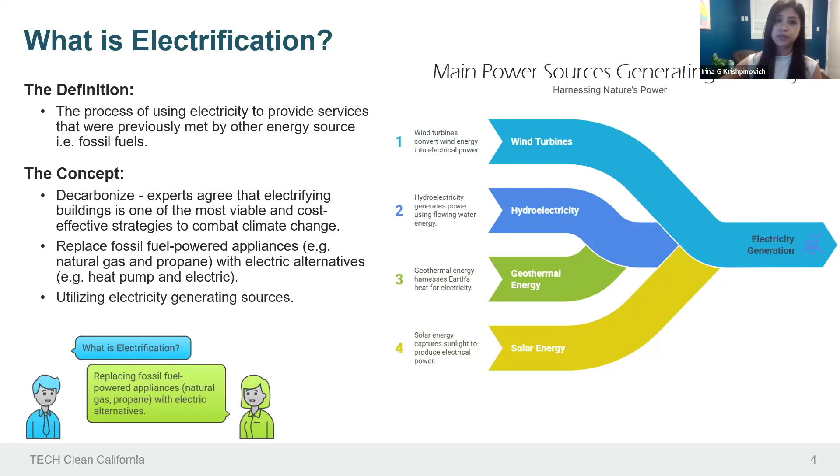An overview on decarbonization. What is decarbonization? In the previous slide we touched on what decarbonizing is in an action approach, but what ultimately is the term decarbonization? It is the process of reducing or eliminating carbon dioxide, CO2, emissions to mitigate climate change. The concept is to reduce or eliminate carbon dioxide emissions that result from human activities, primarily by decreasing the use of fossil fuels and increasing the adoption of low carbon and renewable energy sources.

Moreover, when replacing fossil fuel powered appliances, the electric alternative is key. Once more, the process of decarbonization is reducing and preferably eliminating emissions, reaching that net zero goal we have in place, reducing or eliminating the carbon dioxide emissions being released into our climate.

So when we're talking about carbon emissions from buildings, it could be retail or factory style emissions being released. We're also talking about vehicles, which release emissions into the air, no different than our common households: single family residences, mobile homes, multifamilies, and commercial buildings are definitely one of the leading contributors. Buildings account for 40% of global carbon emissions. A fun fact there, and hence the emphasis on building electrification as a whole.

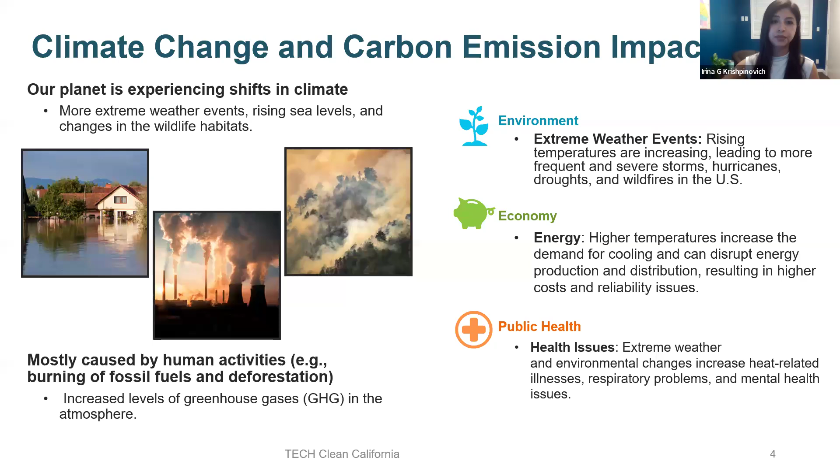Energy sources, that is, of course, fossil fuels. There's a couple different types of fossil fuels. Coal - burning coal for electricity generation is one of the largest sources of carbon dioxide emissions that we emit.

Next up is oil. Oil combustion, primarily in the form of gasoline and diesel fuel for transportation. And then lastly, one of the more commonly found within our residential home, if you haven't already fully electrified your building, is the burning of natural gas for electricity and heating, which emits and exposes us and our climate to carbon dioxide and methane.

A little fun fact: California is the nation's second largest natural gas consumer. Texas is number one.

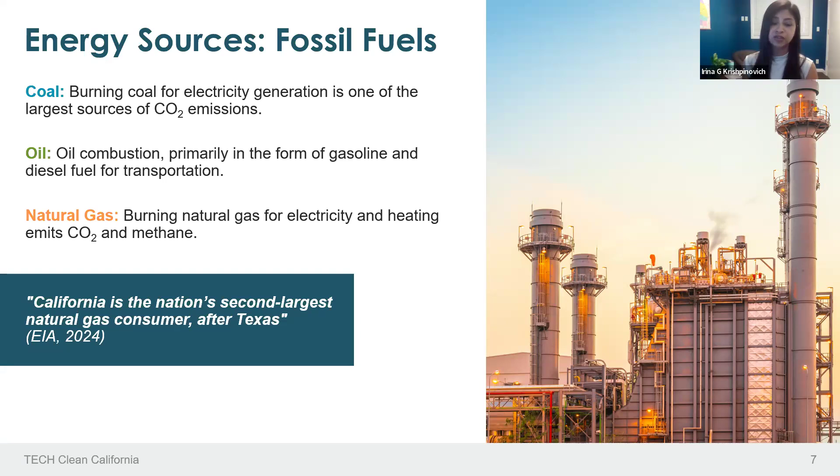Why electrification matters - a high level glimpse. We've talked about the impact of releasing these carbon emissions, how that plays a role in our environment, our overall health, and of course financially, what that cost is. So why does electrification matter?

Case in point, it improves our indoor air quality - no different than the impact we discussed in the environment outside of our home. When we electrify our home, we're also reducing the recycled air traveling through our ducting systems when we run our heating and cooling elements. So you're also seeing that co-benefit within the comfort of your home, adding that extra layer of safety and improving your indoor air quality.

Once more, I just touched on safety - electrification increases the safety and comfort within your home. Simultaneously, one of the many co-benefits to electrification is that we're contributing to reducing greenhouse gas emissions. In doing so, we're supporting renewable energy and energy efficiency through increased safety, eliminating risks of gas leaks and explosions. Improved air quality then reduces those harmful pollutants from combustion.

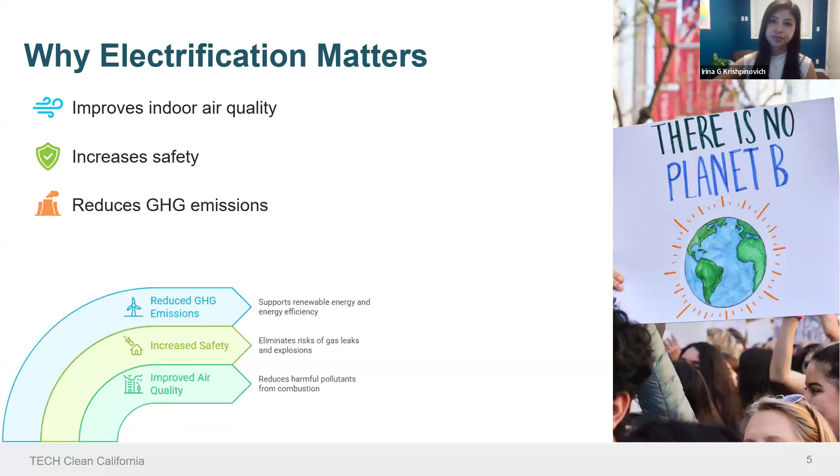So what is the state of California doing to be part of that solution? California's climate action strategy is being delivered through many different avenues, starting with key legislation and policies. Within the state of California, from a legislative perspective, we've already implemented and approved policies to advance clean energy alternatives: Assembly Bill 1279, Senate Bill 100, Senate Bill 1020, AB 3232, and Senate Bill 1477.

Aside from the legislative standpoint, we also have our governor setting bold clean building goals, with the ultimate intent to accelerate the deployment of clean and efficient fossil-fuel-free buildings. There's already a roadmap of targets we'd like to hit - by 2030, Governor Newsom's goal of 6 million heat pumps installed in buildings throughout the state of California.

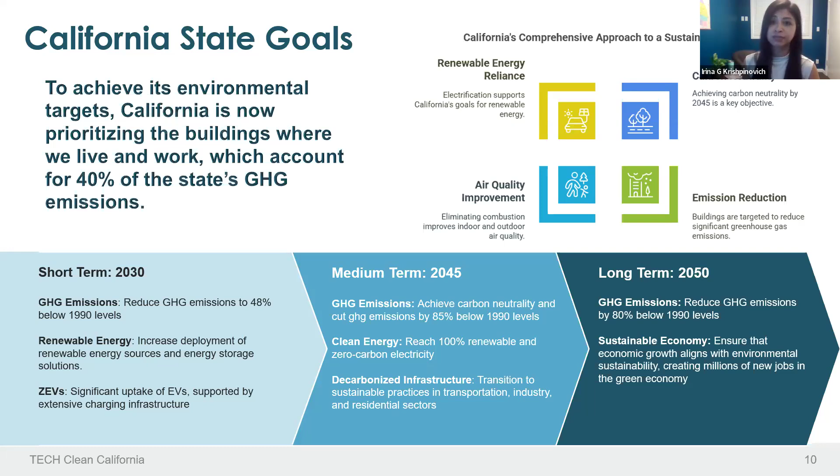The impactful role of electrification. What role does electrification play when we are talking about decarbonizing residential buildings? What does that look like? Before we get into the details of what that looks like in our home, let's take a step back and have a better glimpse of what exactly building electrification is.

Building electrification is the replacement of fossil fueled equipment, for example, space heating, water heating, and cooking, with electric alternatives. In other words, we're simply removing fossil fuels from the building's energy use or reliance.

Once more, that important question: why? Why is it important, why are we aiming to electrify our buildings? Decarbonization experts agree that electrifying buildings is one of the most viable and cost-effective strategies to combat climate change. The term electrify or electrification is essentially just a fancy word for fuel switching. When electricity is generated using a clean and renewable energy source, electrification actually becomes a strategy for building decarbonization.

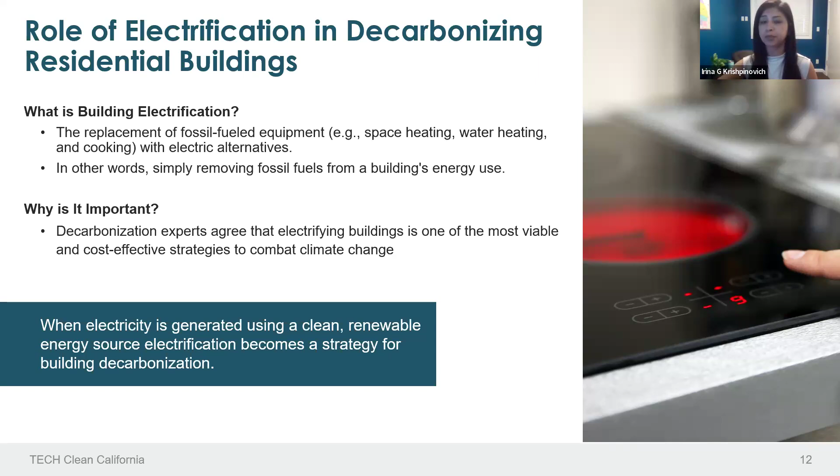Many traditional HVAC systems, especially the older models, require more fuel to produce the same amount of heat, so they're working harder to deliver more. Some electric heating systems are powered by electricity generated from fossil fuels, and the older electric heating systems can be much more inefficient.

Greenhouse gas emissions are changing our climate and affecting our health. So once more, reeling into why electrification matters: what are our options, how is this impacting things, at the end of the day who is reaping the benefits, and in essence the goal is a cleaner, healthier, sustainable future.

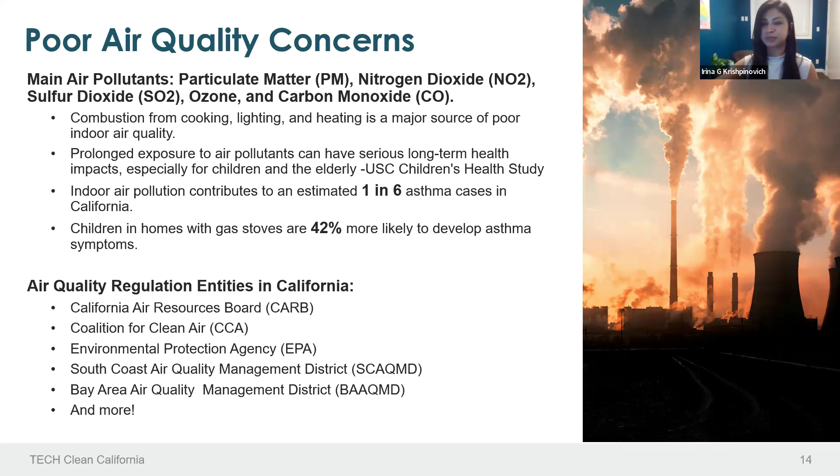Safety. Fire safety. When we're talking about electrification, we touched on the safety within how those emissions are affecting the quality of our health. There's other layers of safety to also take into consideration when we are educating our communities on fire safety.

Reduce risks associated with gas leaks, explosions, and fires. Additionally, modern electric appliances follow strict safety standards, significantly reducing fire risks. So when we are taking into consideration replacing your natural gas or propane fueled stove, for example, with an all-electric one, we are doing our due diligence in reducing or mitigating those fire risks.

Additionally, part of the safety component for us is going to be operational safety. Many modern electric appliances have built-in safety features, for example automatic shutoff features and temperature control features, and these types of safety features reduce the risk of overheating and accidents.

I am one guilty of it, in which I start boiling water, for example. I'm a multitasker, probably have slight adult ADD at times, completely forget that I have that water sitting on the pan boiling, and by the time I remember and come back, that water's probably almost gone. No different than I am guilty of having left a pan heating in oil.

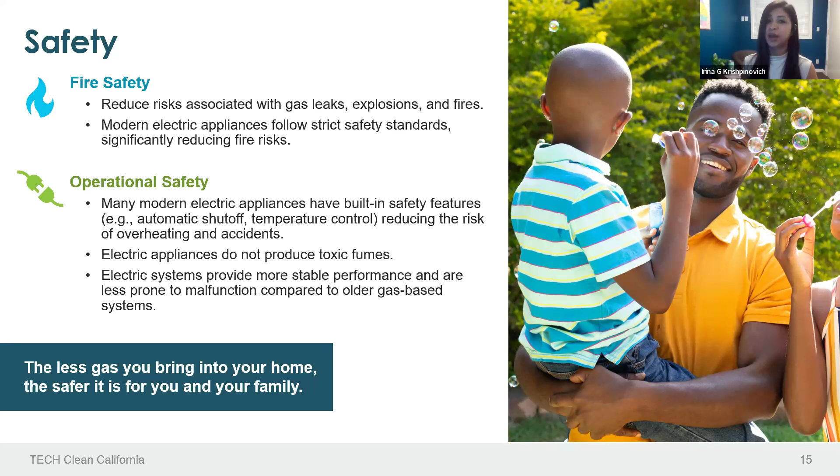Building electrification. So we touched on what building electrification is and what that essentially looks like within your home. What is the concept of building electrification? We're going to take a deeper dive into what exactly creates carbon within homes.

All release carbon dioxide and other pollutants like NOx during combustion, contributing to indoor pollution.

Essentially, here you see a graph breaking down some statistics from 2019, showing residential natural gas consumption per household within California. As we can see here, you have your more commonly running units within your home: your water heater, your space heating, whether that's your HVAC, your dual pack, your split system, or your mini split -- well, not mini split, we're talking about carbon releases here -- cooking, your dryers, and extending into miscellaneous items such as pools and spas.

Evidently here on our chart, we notice that water heating contributes to 59% of the consumption. So essentially, we use our water heater often, yet it is the one actually consuming or releasing the most, contributing to those thermal releases.

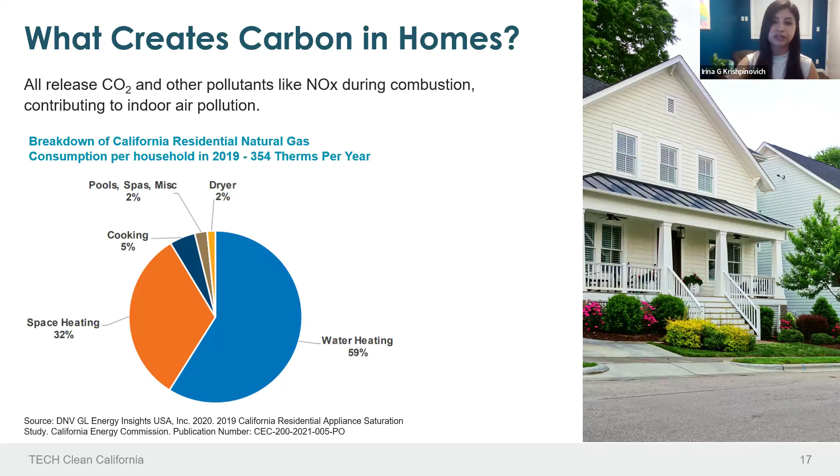So looking at that chart and better understanding the behaviors, or needs, within a residential home, we've been able to identify once more the most commonly utilized gas appliances within your home, but also which ones are consuming the most, and emitting the most of those unhealthy emissions.

So what are solutions or alternative solutions for those gas appliances? We're looking at heat pump technologies. Within the HVAC world, that can be a heat pump dual pack, a heat pump split system, or, if inadequate ducting or no ducting system is present in a home, an option of heat pump ductless mini split systems.

We also have an alternative option of heat pump water heaters, the electric and/or heat pump clothes dryer, as well as the electric resistance or induction cooktops. So essentially, here in a nutshell are four potential alternative options for us to be able to offer our communities when it comes to fuel switching, replacing their natural gas and/or propane fueled appliances for an all-electric, cleaner alternative.

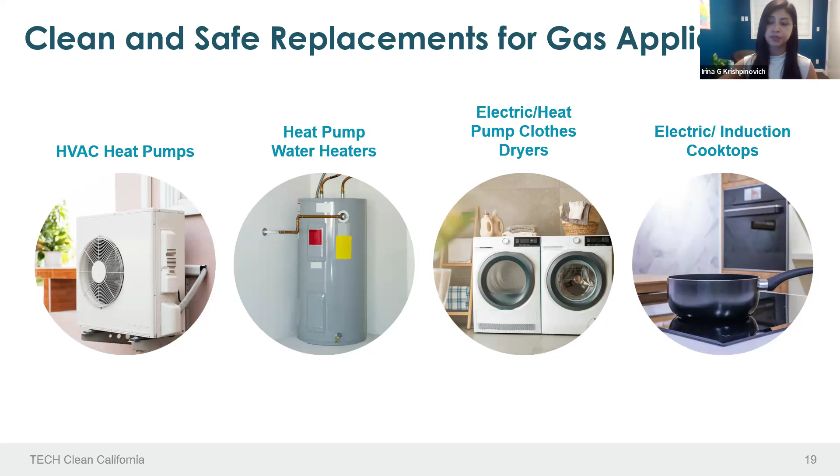What are those benefits of fuel switching? What are we looking at if we're giving up natural gas and propane and going on electric? As a community member or individual taking this into consideration, I would very much want to learn and understand what benefit am I getting out of this at the end of the day, not only for my home, but also doing my part ultimately for the world we live in.

So once more, electric appliances are much more efficient. For example, heat pumps can be up to 4 times more efficient than traditional gas furnaces.

We're also talking about cost savings. At the end of the day, we face communities where some members or residents are on fixed income, so we're talking about how this affects you positively, financially. Due to their efficiency, electric appliances often have lower operating costs. For example, heat pumps can significantly reduce heating and cooling costs.

A couple slides back, we touched on how older furnaces, older units have to work 2x, 3x, 4 times more. They have to draw more energy, requiring more to keep up with the output. The advanced technologies offered today actually deliver the same performance with less energy, making it more efficient.

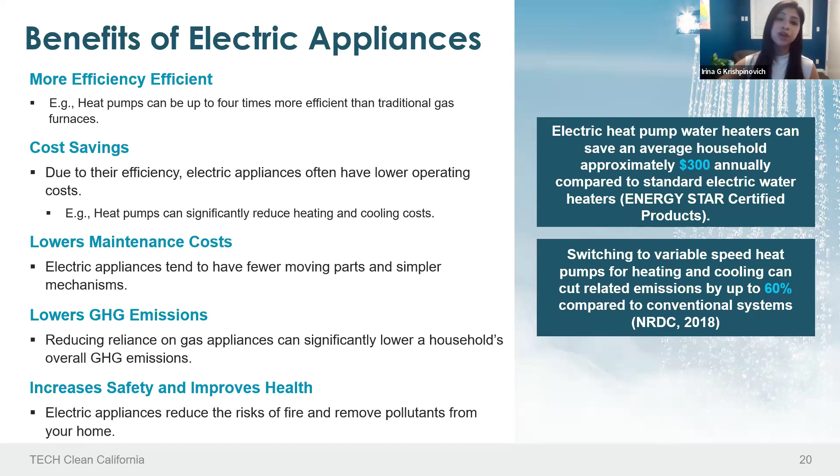The infamous question: what are heat pump technologies? In the market, we have a heat pump dual pack, a heat pump dryer, a heat pump water heater. But ultimately, what is a heat pump? How does it work? How is it beneficial to me, depending on a heat pump and the way its mechanisms function?

In essence, heat pumps are very essential for building electrification, because again we're talking about that fancy terminology of fuel switching. Benefits of heat pumps: they are efficient and versatile. That's what they offer, much more efficient, and they can still meet the demand of providing both your heating and your cooling. So not only is it the same performance, same output, in a much more efficient manner.

The cost and comfort at the end of the day for heat pump technologies: it offers higher cost savings with improved comfort.

One thing that is a commonly asked question, or not a concern but something to take into consideration within cold climates, is that heat pumps can actually use electric resistance heating elements as a backup method during very cold weather. After about, if I recall correctly, high 30 degrees, heat pump technologies like the heat pump water heater can be a hybrid. It's smart technology as well, where once it hits a particular temperature outside of its environment, it picks up that the weather outside hit less than a certain amount of degrees.

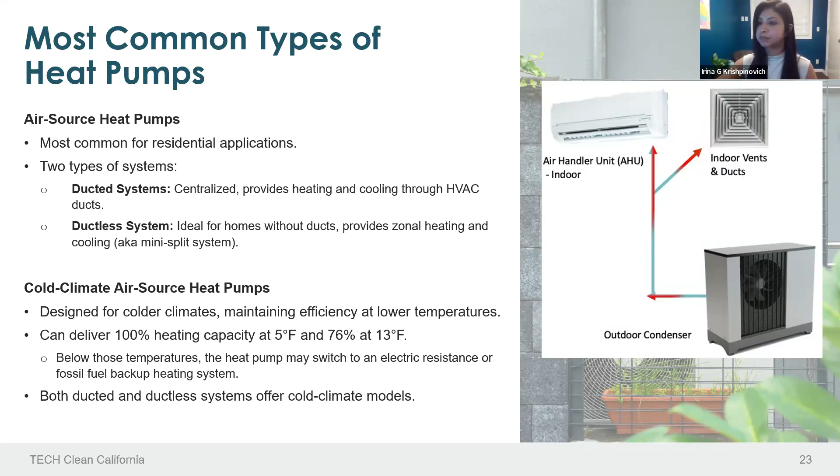Installation and maintenance considerations. These are just some high-level, commonly considered items when you go out into these communities' homes, when it comes to recommending, for example, what size unit we're looking at replacing and or installing for our customers or residents.

One is proper sizing. We need to ensure that heat pumps are appropriately sized for the space to maximize efficiency and performance. That is very key. An undersized unit may struggle to maintain desired temperatures, whereas an oversized unit may cycle on and off too frequently, leading to inefficiencies.

When we have these inefficiencies, besides the unit not performing to its design, that can lead to mechanical issues down the road. It could cause stress on the unit, and then you're also talking about high utility costs. It may also drive higher electrical rates if we do not take the proper, appropriate approach to properly sizing the units to meet the pre-existing conditions and needs of the home.

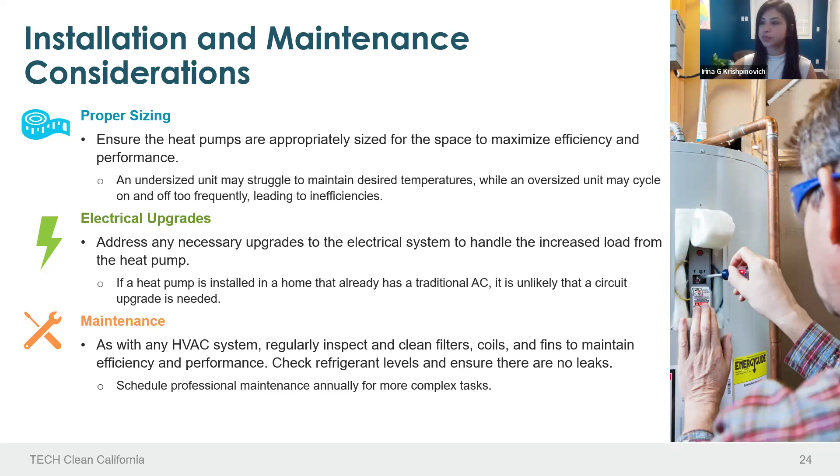This is another video, but I presume that there's not going to be any audio.

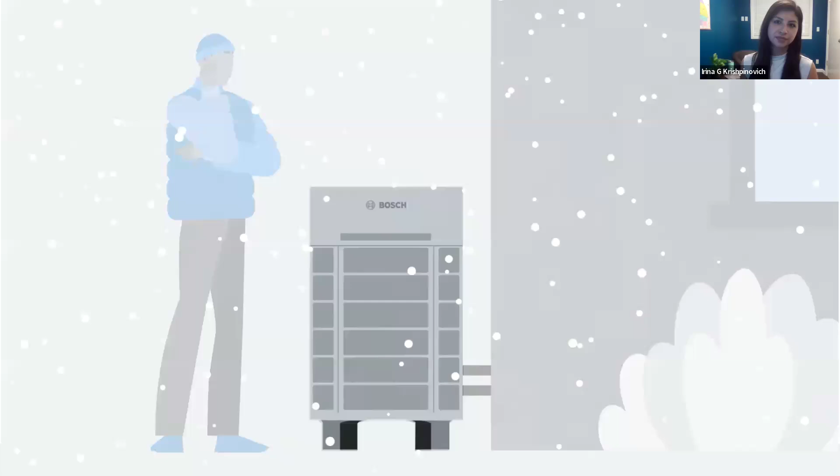Cooling and heating demands, heating during cold winter days and cooling in sweltering temperatures. It's Bosch's first air-to-air solution designed specifically for high-efficiency heating in cold climates. And since it's electric, it can help homeowners reduce their carbon footprint significantly. How does it work? There are basically two units, one outside, one inside. In winter, the outdoor unit absorbs the remaining heat that exists in cold air. Even the coldest air contains some heat, and Bosch efficiently captures that energy into the refrigerant. The refrigerant gets compressed to increase its temperature even more and releases it at the heat exchanger in the air handler inside the home, which distributes that warm air through the whole home for cozy, warm indoor temperatures.

In summer, the process is reversed. The air handler absorbs the heat from the air inside, and the heat pump transfers it to the air outside. The compressor circulates refrigerant to the indoor evaporator coil, and the refrigerant absorbs heat as it passes over the indoor air. The resulting cool and dehumidified air then gets blown back into the home. In short, the new inverter heat pump from Bosch offers the heating and cooling solution for almost all weather conditions.

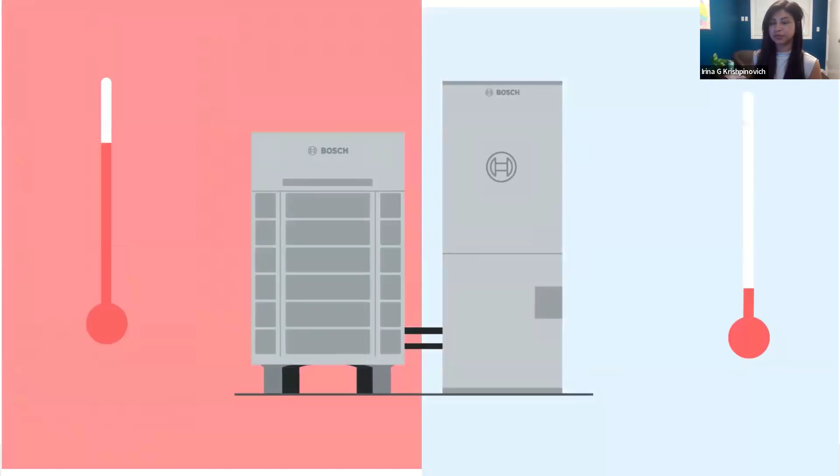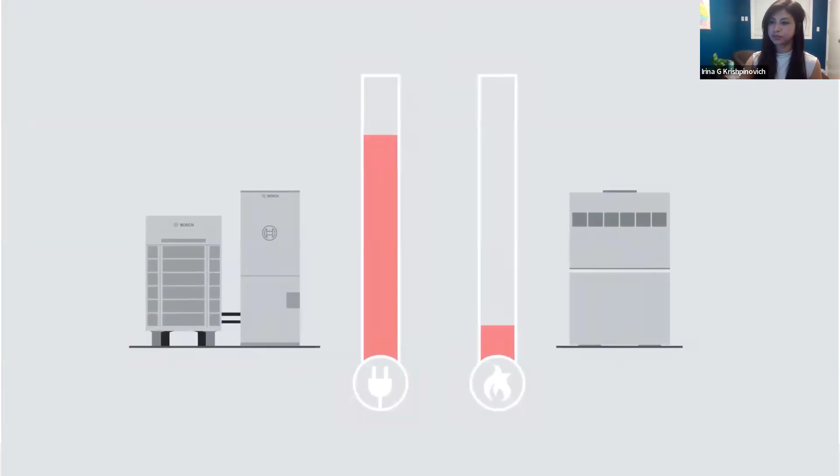Another step forward towards a cleaner energy future. So North America, energized like a Bosch.

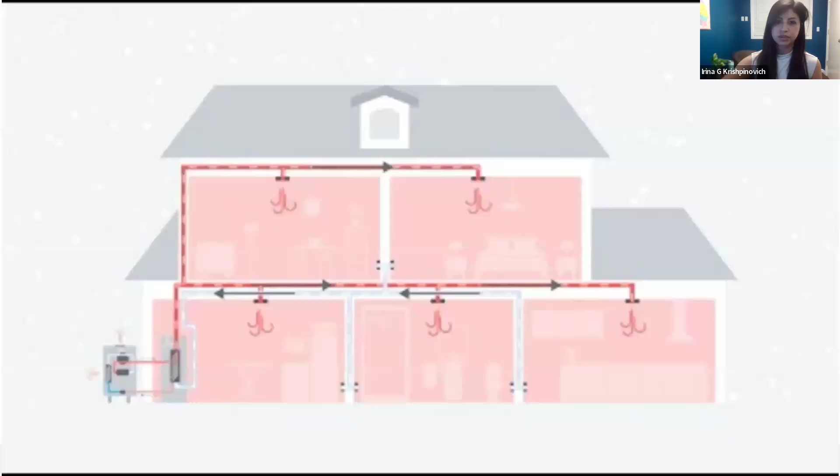So Bosch is just one of those manufacturers who are providing inverter units, heat pump units at the end of the day. Just one of many different manufacturers out there offering this technology for HVAC.

We're going to move right into heat pump water heaters. I'm very glad there was audio on the last video. In essence, not to market this, this is not a paid promotion for Bosch, definitely would like to add that disclaimer here. But really liked how that video, in a nutshell, very clean, very clear, provides a good understanding of how a heat pump functions.

But moreover, this other layer or piece that may be a concern when we're having these conversations in the field with our communities is that people have heard when temperatures drop, that unit doesn't work. Well, it does, and this is how. So once more, these are the tools, this is the education that we're having this ambassador training today to provide you with that knowledge, those tools and resources, so that you can confidently be empowered to articulate and answer those questions and concerns that community members have when it comes to electrification, specifically heat pump technology and how it's still capable of performing even in 5-degree weather, which we don't get here in California, but nevertheless certain climates can get that cold.

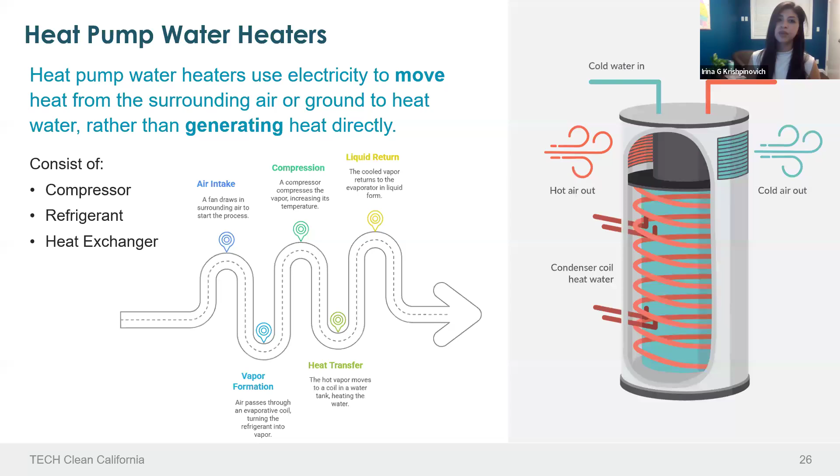What are some advantages of heat pump water heaters? Lower upfront costs for customers, and we're lowering operating costs overall.

It's offering operation control. Once more, it's a smart system, right? It's going to be able to adjust to not only the demand of the home, but also acclimate to weather conditions, and reduce emissions.

We've talked about the importance of reducing and or eliminating those greenhouse gas emissions by consuming less energy. We have increased resilience. The stored water in a heat pump water heater provides hot water even during an outage, so you still have access to that hot water. And then also more energy efficiency.

Once more, talking about the newest and latest modernized units, the technology just keeps improving, always working out the kinks of where we were at 5 years ago. Heat pump technology has advanced significantly since, so they've indefinitely become much more energy efficient, utilizing less energy, and essentially they use 50 to 70% less energy while still heating the same amount of water.

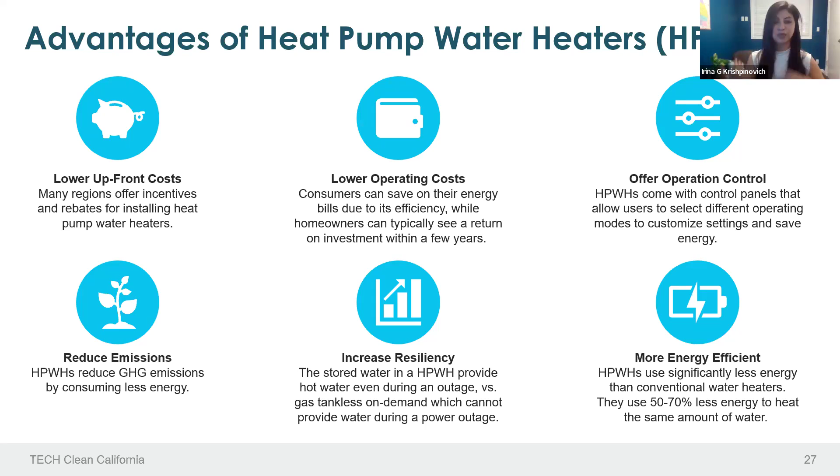So we talked about performance - delivery is still there to meet your demand as comparison to that of a natural gas and or propane fueled system. But once more, the system's not working as hard, thus not requiring as much energy, thus you're not consuming as much energy, hence reducing our energy usage and utility bills.

Installation considerations when we are looking at recommending a heat pump water heater for a replacement and or installation in our communities. Number one, of course, upon approach - and contractors, I know you're very mindful already of this when you are approaching a home - indefinitely space requirements.

Heat pump water heaters actually need a little bit more space than your traditional natural gas water heaters compared to the conventional water heaters that we're accustomed to, because they actually require and rely on that airflow that's circulating around the unit to be able to function efficiently.

Ventilation, proper ventilation is critical and crucial for heat pump water heaters to ensure that they are efficiently extracting those heat molecules from the air. They should be installed in locations where the air temperature remains relatively moderate throughout the year.

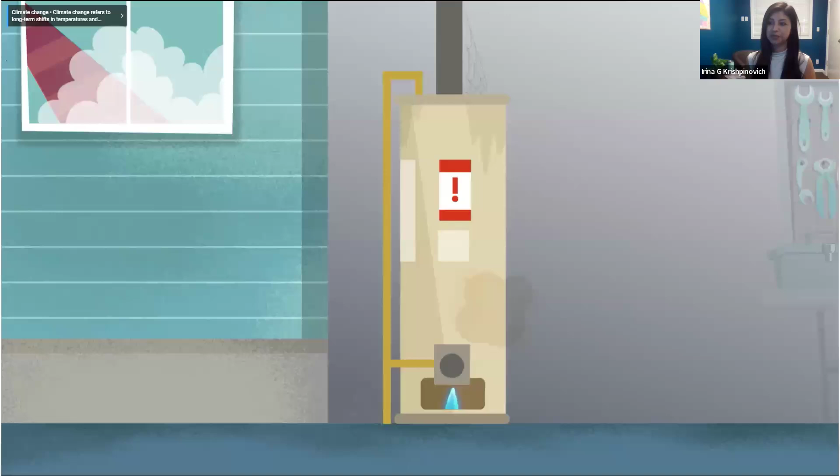Water heaters are the unsung heroes of our homes. They labor without pay or pause, stuck in the closet or garage, and most of us don't give them a second thought. That is, until they break. Then we want to replace them fast and get back to our busy lives. We typically just slap in the same old technology, like gas, without considering that we might be missing out on a better alternative: ultra-efficient electric heat pump water heaters.

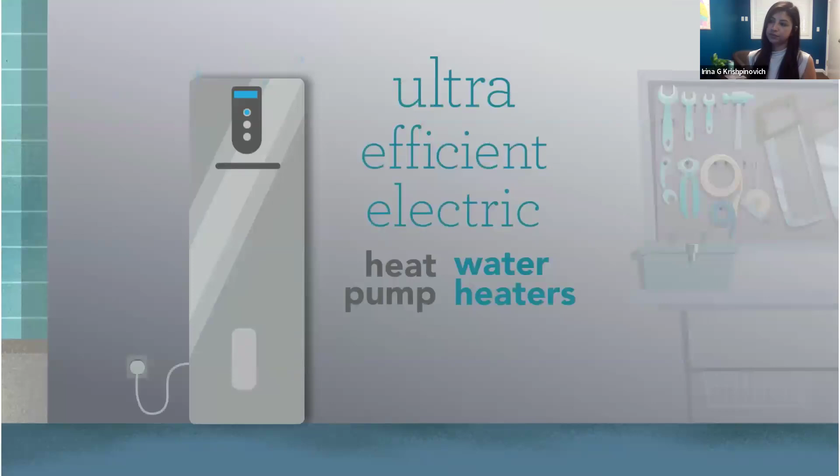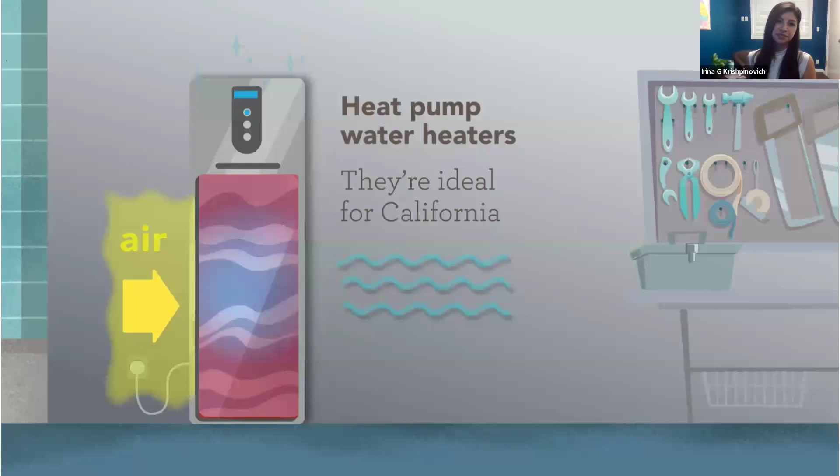Heat pump water heaters use electricity to move heat from the outside air into your water heater, like a refrigerator running in reverse. They're ideal for California, where our winters are mild. And because they're only moving heat from one place to another and not actually creating heat, they're super efficient. This efficiency can amount to savings on your energy bill.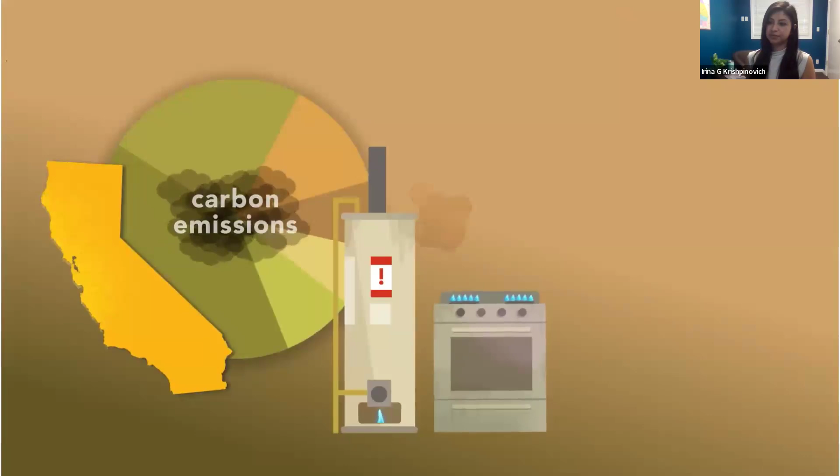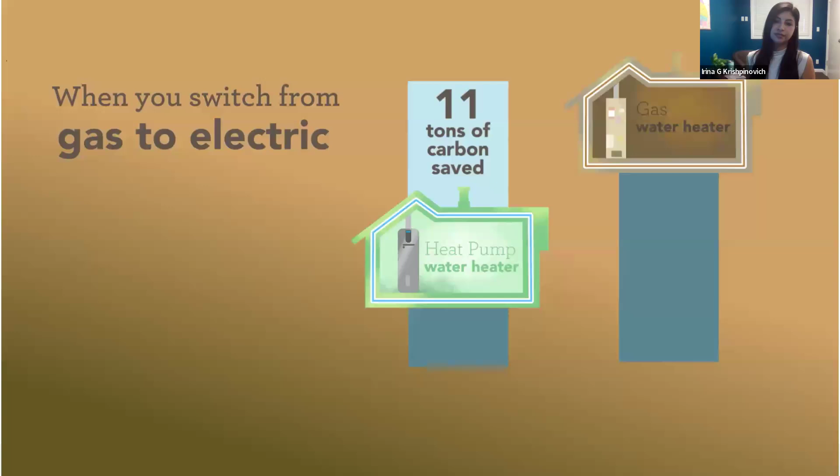If we don't start getting rid of our gas appliances, we'll never get ahead of climate change. Here in California, one of the biggest sources of greenhouse gas emissions is from burning gas for heat and hot water. When you switch from gas to electric, you avoid emitting about 11 tons of carbon dioxide over the estimated life of your new water heater. You'd have to plant 11 large shade trees and wait more than 50 years to absorb the same amount of carbon.

Not only will you save money and fight climate change, you'll help create a healthier community. That's because gas appliances like water heaters emit carbon monoxide, ozone, and particulate matter, the types of harmful pollutants that can lead to respiratory illnesses. Studies show that getting rid of gas appliances could save thousands of lives and billions of dollars in California every year.

So, when your water heater needs to be replaced, consider a more efficient technology. Heat pump water heaters are safer, healthier, fight climate change, and save you money.

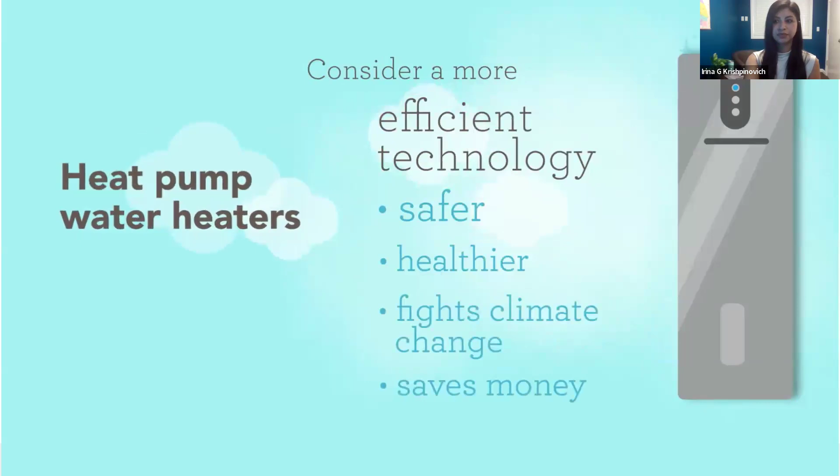Awesome. Water heater. Induction cooking. So induction ranges.

For this particular appliance, induction stoves utilize electromagnetic fields to directly heat pots and pans made of magnetic materials. So in essence, whether that be a cooktop, a standalone, or slide-in range, the top surface layer will require special pots and pans. Some customers may already have unique pots and pans that are compatible with induction ranges without even knowing it. But one thing to highlight is that not just any pan or pot will work to be compatible with these induction ranges, because of that electromagnetic field, and there's a purpose behind that.

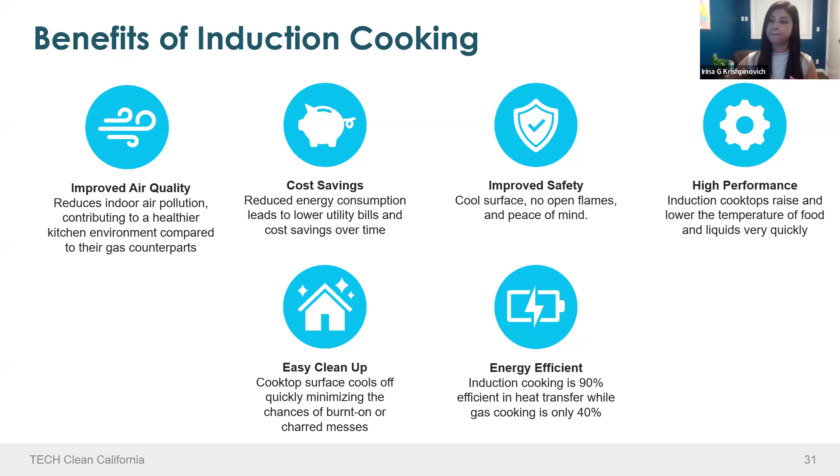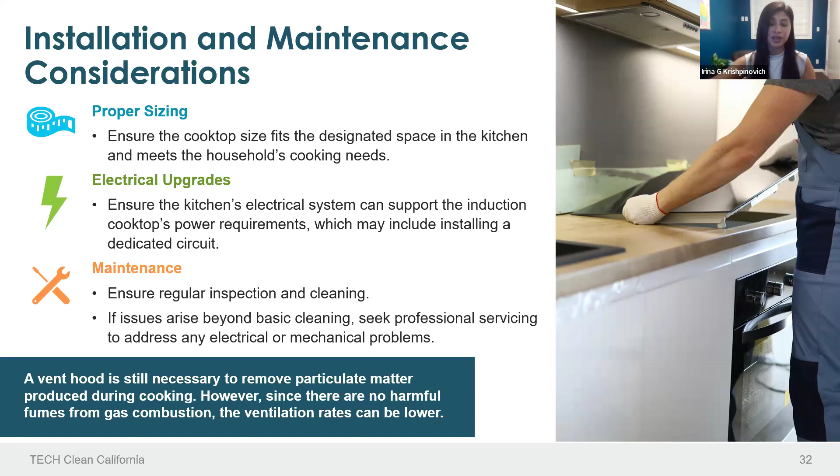Induction cooking generates heat by combining electricity and the magnetic properties found in most pots and pans. The cooktop remains cool to the touch until you place your induction-compatible pan onto the glass surface to begin heating. Once placed, it quickly and precisely heats to the selected temperature.

Most high-quality pans will work with induction cooking. If you want to be sure, you can test them by holding a magnet to the base. If the magnet sticks, your cookware will work with induction.

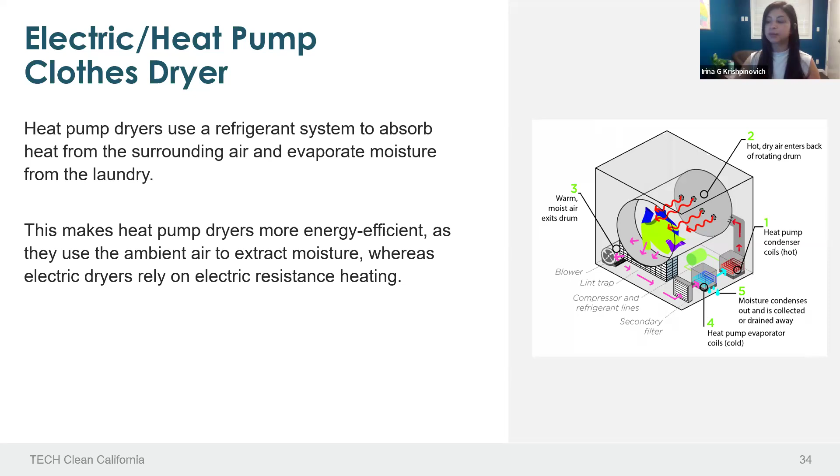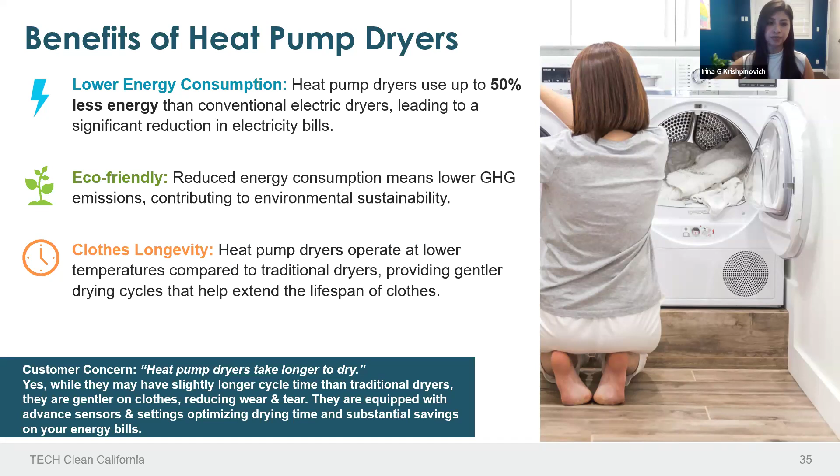Installation considerations for this appliance: heat pump dryers typically require more space for proper ventilation and may have a higher upfront cost compared to conventional electric dryers. However, it's important to note that energy savings over time can offset the initial cost, the return on investment when investing in these dryers upfront. Heat pump dryers do not require external venting, unlike gas dryers and traditional electric dryers, which simplifies installation and reduces the need for additional accessories or equipment.

Lastly, maintenance: regular maintenance, such as cleaning the lint filter and ensuring proper ventilation, is critical and essential to maintain the efficiency and performance of heat pump dryers.

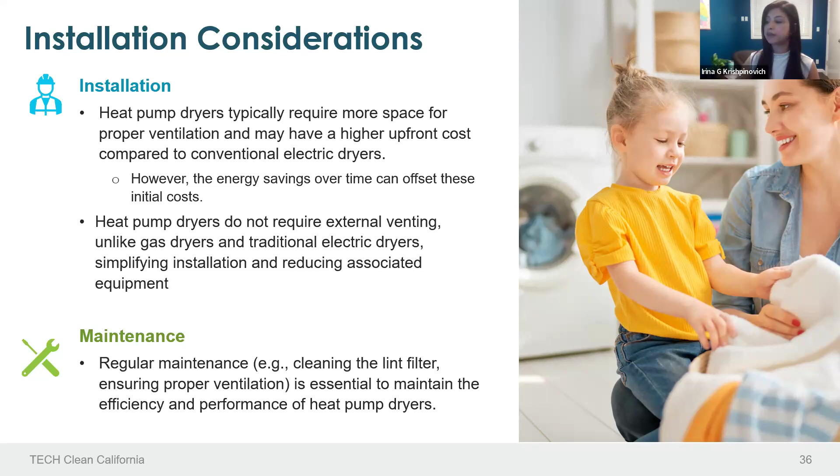Why should you upgrade to an ENERGY STAR certified heat pump dryer? Well, if you want to get technical, let's look at the innovative way it saves energy. Notice there's no heating element and no vent.

But why? A heat pump uses technology similar to an air conditioner, but operates in reverse. Air is pulled through a condenser where it is heated before entering the drum. The hot air then absorbs moisture from your clothes. Next, the damp air goes into an evaporator, which removes the moisture and collects or drains it.

The real savings happen next, when that same air is pulled back through the condenser to be reheated while still warm. In other words, we save by recycling warm air instead of releasing it through a vent and using energy to heat new cold air. Now that's a good use of hot air.

So remember, while on the outside this dryer may look the same as other dryers, it is special because the heat pump technology on the inside uses 50% less energy, and that's 100% great for us and the environment. Find your ENERGY STAR certified heat pump dryer at ENERGYSTAR.gov/HP dryer.

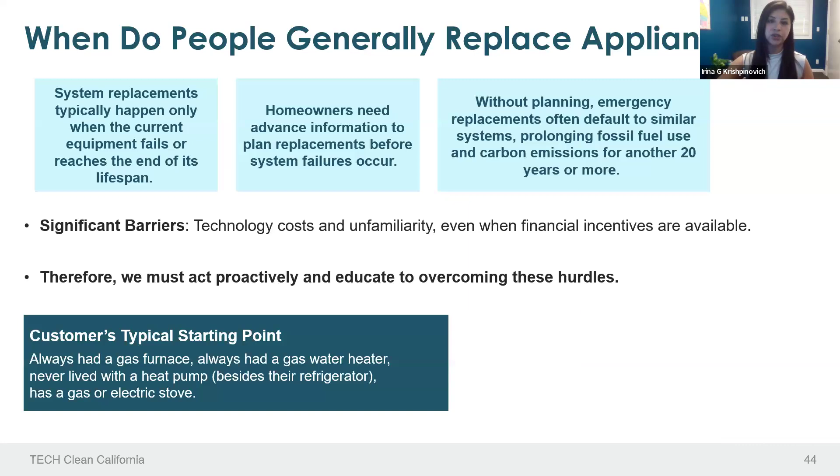I did not mean to do that, so I find it odd how it skipped. I think we went from break to customer communication and the value, and then to when do people generally replace appliances?

I am going to move right into messaging strategies for quality of life improvements through electrification. Some items to continue to consider—I feel like we've been repeating this one as well—improved indoor air quality.

We're talking about the comfort within your home: consistent temperatures, quiet operations from those appliances. And then there's these other added values that sometimes we fail to recognize, like added property value when we are modernizing our homes. That does also actually increase property values.

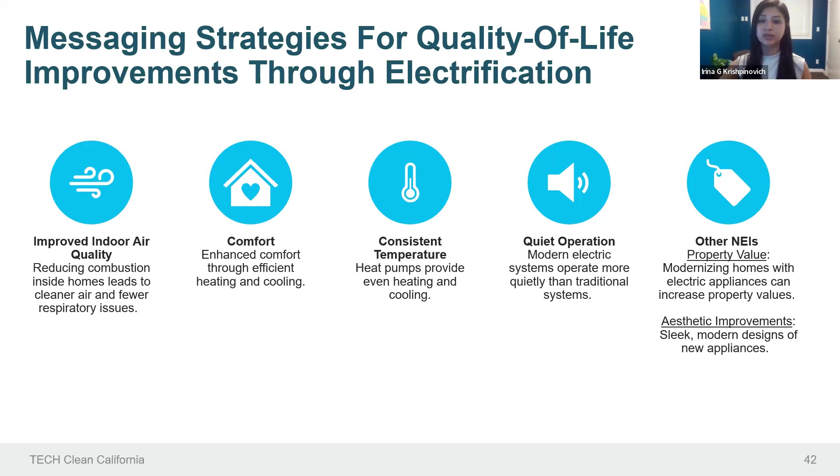Time of use behavioral education to avoid peak prices. There are many different tiers that our utilities now offer, so knowing and understanding how the TOU rates work can actually help those consumers save on their electricity bill by using more energy during off-peak times versus when the rates are higher.

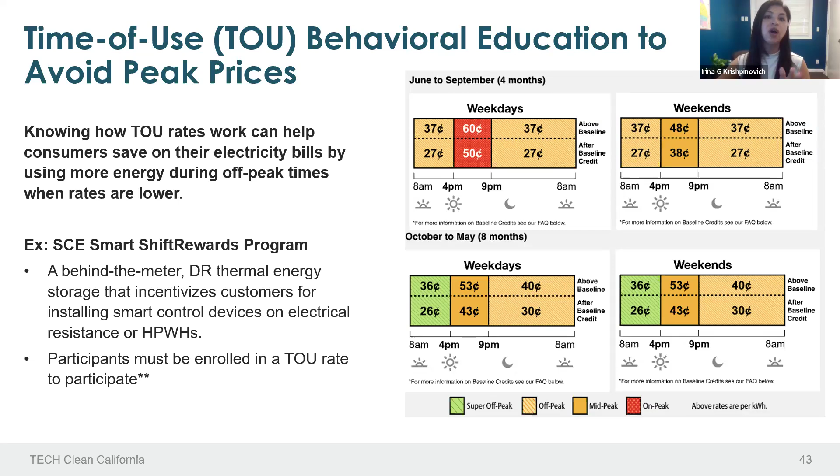This is another layer of education as our due diligence as contractors, CBOs in the field, to continue to provide consumers, the customers, the residents, with that added layer of education for them to better understand how their behavior towards energy consumption also plays a factor when we're talking about energy conservation.

Time of use behavioral tips, once more on appliance use. Running appliances such as your dishwasher and laundry appliances during off-peak hours, automation using smart technologies already built into some of our units, for example the smart thermostat, to manage energy usage. Preheating and pre-cooling your home during off-peak times can maintain comfort within your home, minimizing energy costs during peak hours.

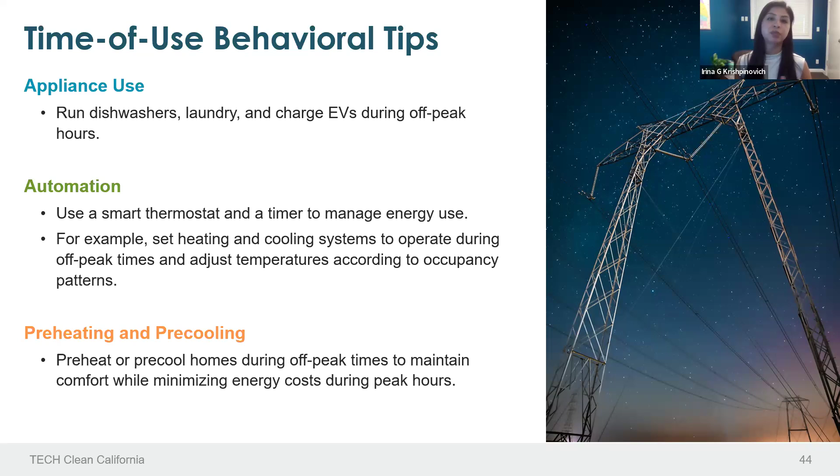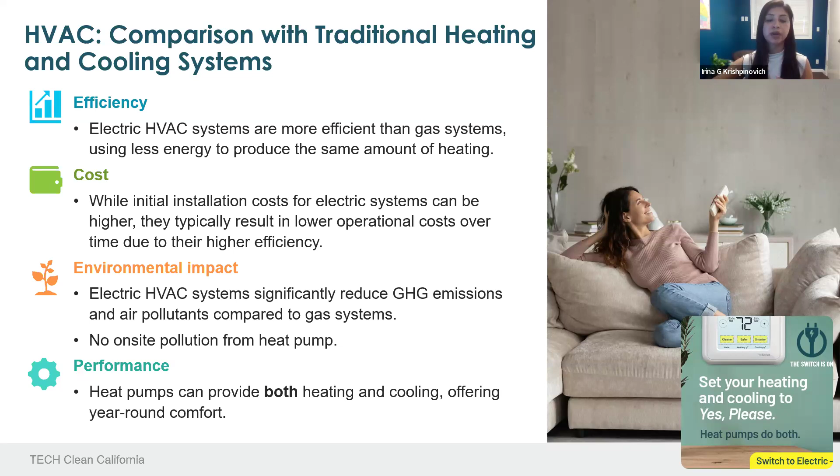Heat pumps can provide both heating and cooling, offering year-round comfort. The HVAC temperature and airflow, the CFMs - heat produced by a heat pump feels different than that produced by a furnace or a radiator. So it's very much about understanding temperature regulation. Heat pumps may deliver heat at a lower temperature than gas furnaces, but can still maintain a comfortable indoor environment.

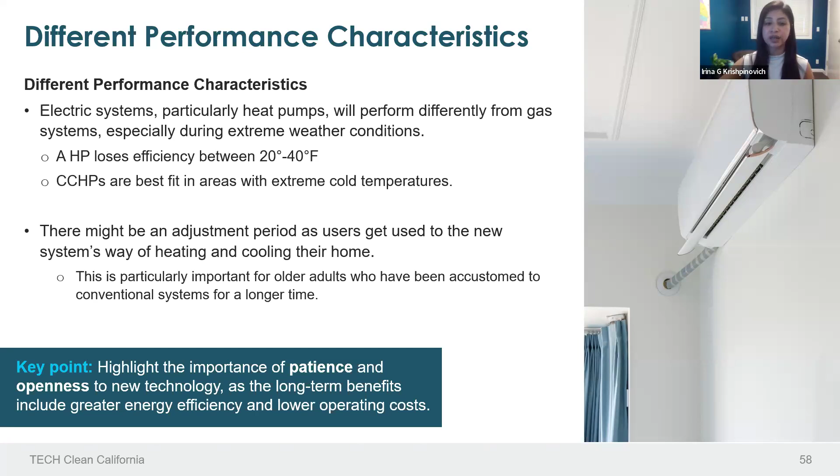We're also looking into the airflow. Heat pumps circulate air differently, often providing a steadier but more continuous airflow compared to traditional systems. Think of a heat pump similar to the cooling and heating of your car and how its characteristics operate - different performance characteristics. Electric systems, particularly heat pumps, will perform differently from gas systems, especially during extreme weather conditions. A key point to highlight is the importance of patience and openness to new technology, because the long-term benefits include greater energy efficiency and lower operating costs.

Common troubleshooting steps for minor issues with HVAC heat pumps: for example, an issue is reduced airflow. A potential solution we can walk a customer through is to clean or replace the air filters and ensure the outdoor unit is free of obstructions. Another common issue in troubleshooting HVAC heat pumps is that the system is not heating or cooling effectively. A potential solution we can recommend is to check your thermostat settings and ensure it is set correctly. Customers may also want to verify that the unit has power and is not in defrost mode.

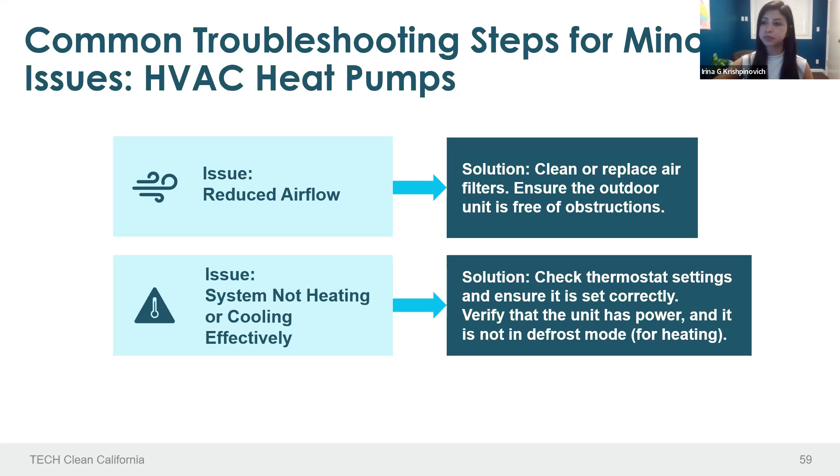Water heating, understanding and explaining operational modes of heat pumps. For example, when to set it in hybrid versus vacation versus keeping it in heat pump mode.

Heat pump water heaters use only the heat pump feature, but when we have it strictly in heat pump performance, that is the most energy efficient water operating system that you can set that heat pump on.

When you're setting it on vacation, for example you're going to be gone for a week or a couple weeks or a month at a time, you can set your water heater on vacation mode. This maintains lower temperatures when the home is unoccupied to save energy.

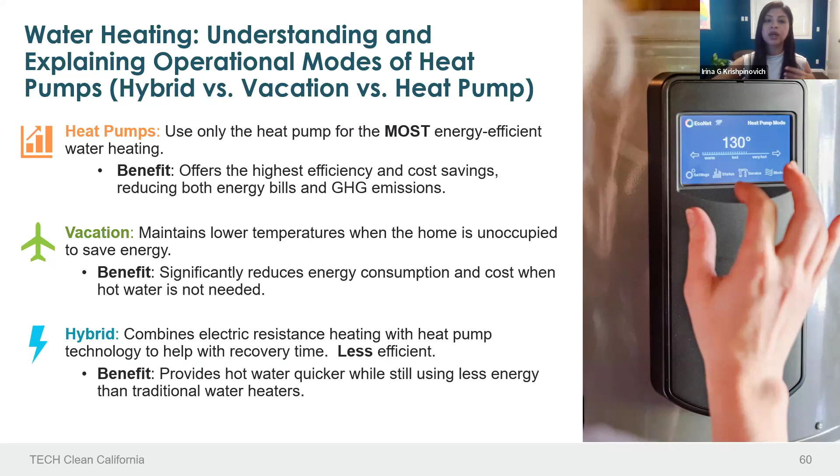There's also setting it to hybrid mode. In hybrid mode, it combines electric resistance heating with heat pump technology to help with recovery time. It's a little less efficient compared to heat pump mode alone, hence why we set those units to heat pump mode to optimize energy efficiency. But the benefit of hybrid is it still provides hot water quicker while using less energy than traditional water heaters ultimately.

Common troubleshooting steps for minor issues with heat pump water heaters. The customer may share that the water is not heating sufficiently. Solution: check the thermostat setting at the unit and ensure it is set to the desired temperature, more often than not 120 degrees, without it being scalding hot.

120 Fahrenheit is what we set it to, specifically to manufacturer standards, and verify that the heat pump mode is active. For any strange noises coming from the unit, inspect for any loose parts or debris around the unit. If the noise persists, contact a professional for further inspection.

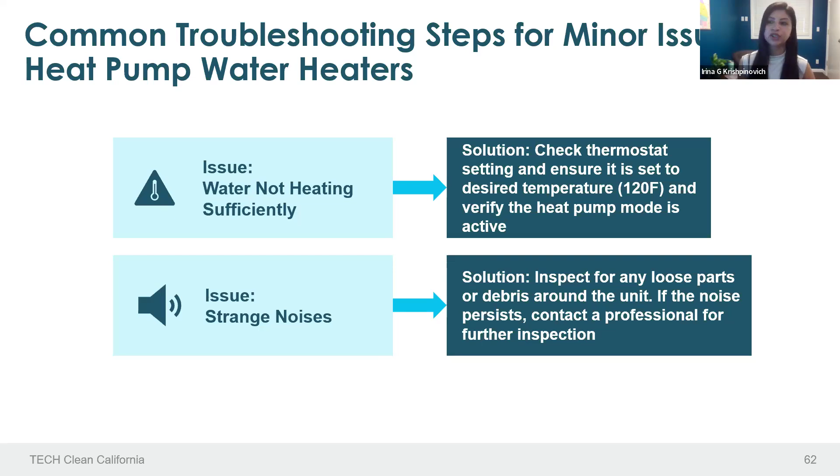Operational tips for heat pumps. Looking at the thermal settings, we want to set that heat pump water thermostat to an optimal temperature for efficiency and safety. Regular maintenance, ensuring the unit, if outdoor, is clear of debris, maintaining airflow efficiency, cleaning or replacing air filters in the HVAC systems.

And professional servicing is recommended, seeking a routine servicing plan for any of your units, whether or not you have a heat pump, even if you're just gas or electric, still servicing your units to maintain optimal performance.

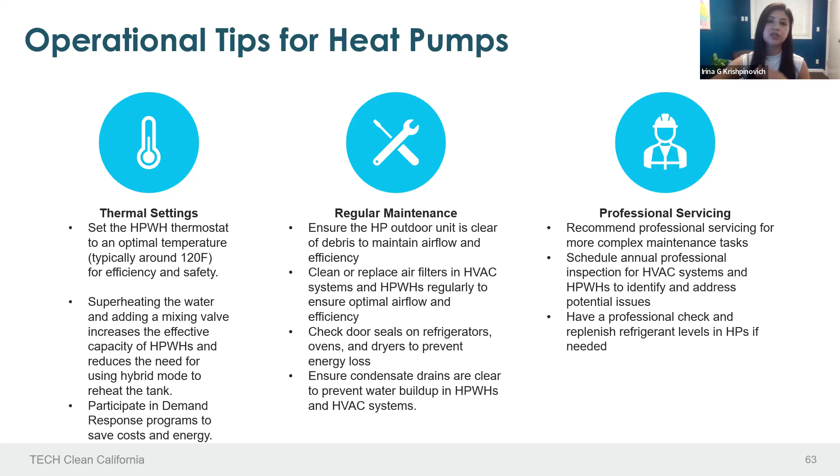Knowing and understanding that yes, clothes dryers are going to take a little longer when we're talking about heat pump technology. This is the transparency part I touched on when engaging with customers. Heat pumps may take a little longer to dry clothes compared to traditional gas dryers because of their lower operating temperatures. As a reminder, they use a refrigerant system to extract moisture at lower temperatures.

But there is an end goal to this. It'll take a little longer, but ultimately using the heat pump dryers uses significantly less energy. Additionally, it actually improves the quality of your clothes because it's more of a gentle drying.

Load management is also going to change behaviors. We talked about behaviors and approach. Load management maximizes efficiency and avoids overloading the dryer. The recommendation is to dry in smaller batches for proper air circulation, which is critical for effective drying.

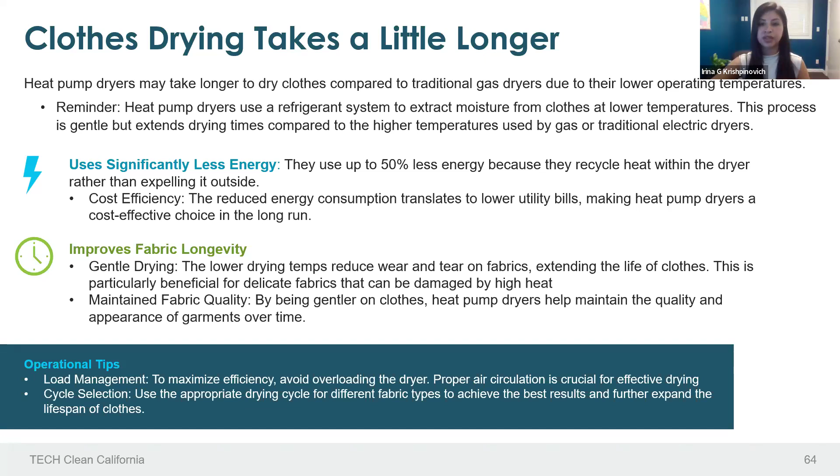Induction cooking, once more one of those top benefits, it heats up fast, no different in that it's able to have precise temperature control when cooking with induction.

Operational tips to maximize efficiency of induction cooktops. We have to use compatible cookware with magnetic bottoms to ensure compatibility. Preheat with care. Induction stoves heat up quickly, but just as they heat up quickly, they also cool down quickly, which is a safety feature.

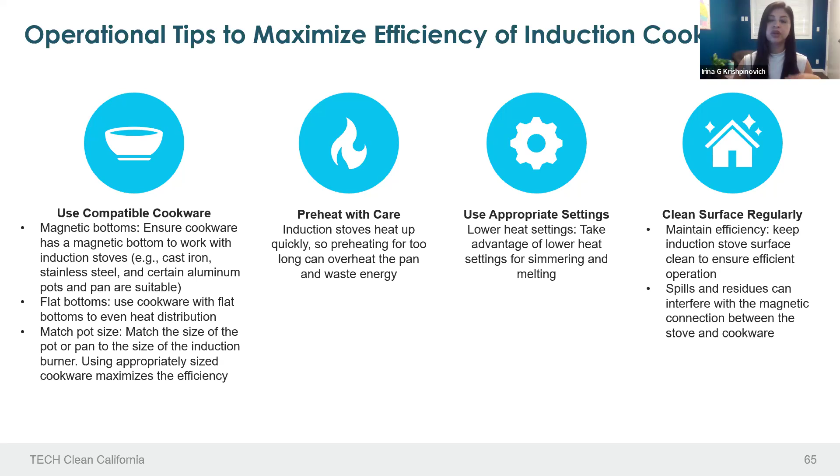Use appropriate settings, taking advantage of the lower heat settings for simmering and melting. And then once more there's that other additive: clean the surface regularly, ensuring we keep the top of that range free of residue, spills, or anything that may negatively interact with the magnetic field of the built-in system.

Common troubleshooting steps for minor issues with cooktops. If it's not heating properly, ensure the cookware is compatible and correctly placed. For issues with uneven heating, use flat bottom cookware and ensure it is properly centered on that burner, since position plays a role.

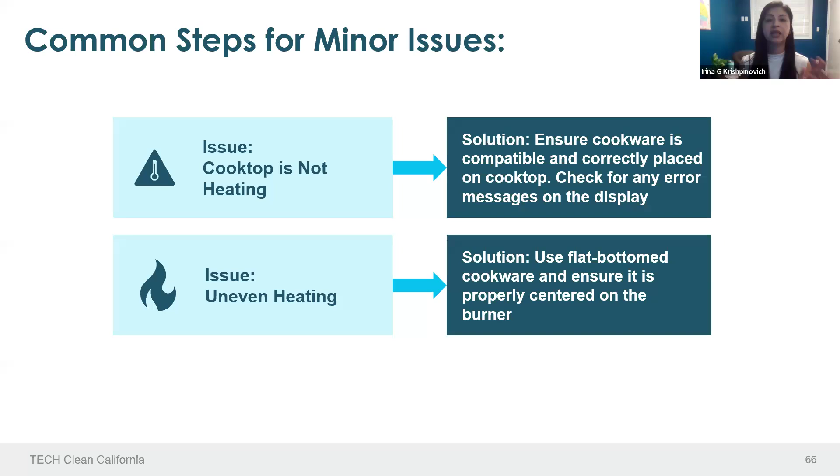Addressing common concerns about electrification, common barriers to adoption, and potential solutions. The upfront cost of electric appliances is often higher than gas alternatives, posing a challenge for low-income households.

Cost-conscious buyers turn to secondary markets to purchase used and inefficient appliances.

So a potential solution when we're talking to customers about adoption is to inform homeowners and tenants about the benefits. This is that key role of the CBOs and the contractors in these community homes—it comes back to ultimately educating the customers, providing them with full transparency of what to expect.

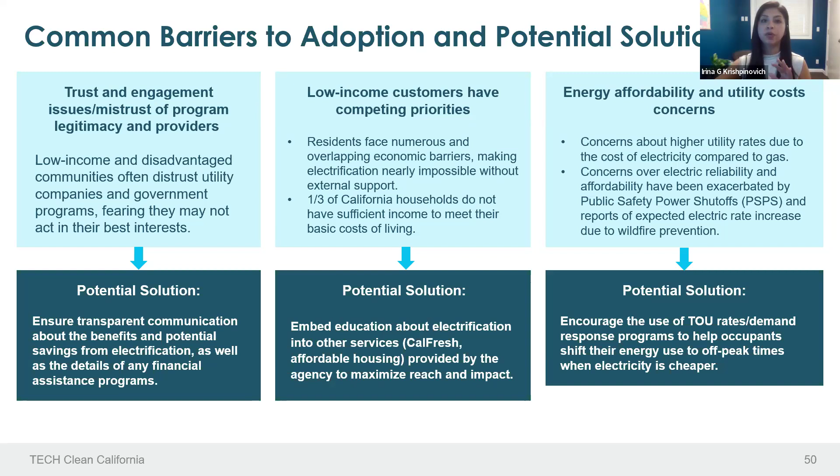Common barriers—this is another slide with more examples. At the end of the day, trust and engagement issues. We talked about the mistrust and how that can easily occur. But when we arrive prepared and educated to inform our communities, that's going to open up engagement for our communities.

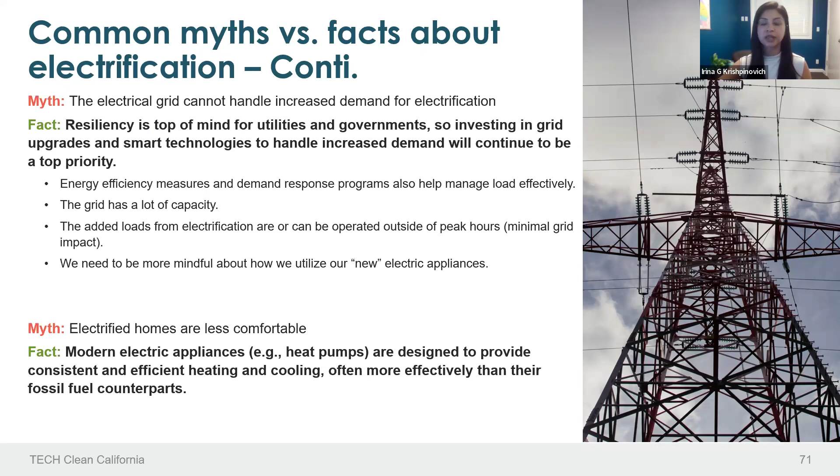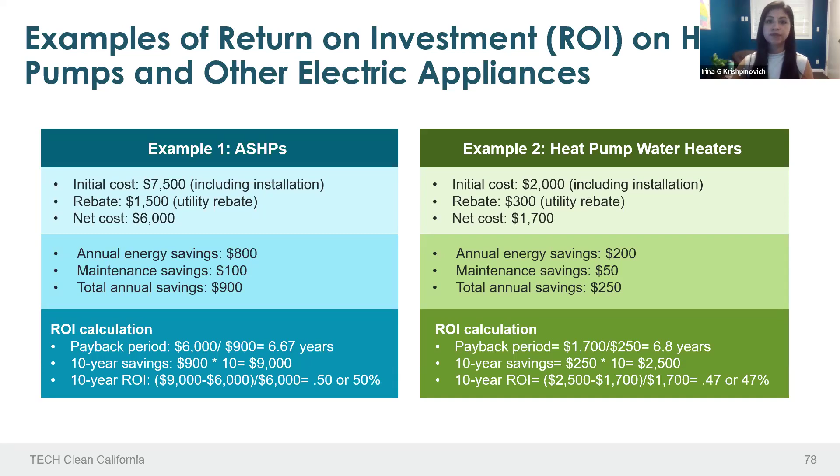Examples of return on investment on heat pumps and other electrical appliances—we're talking about the initial investment upfront. When we look at the long term, that's the return on investment customers are going to see, ultimately annual savings in energy and maintenance, averaging probably around 500 to 1,000 in savings. Putting cost-saving numbers to how much this can really save someone gives us great resources and tools to come prepared and educate customers on the anticipated overall savings they can expect when fuel switching.

We talked about behavioral tips on reducing energy, because it comes back to community behavior and how we have to essentially reprogram ourselves.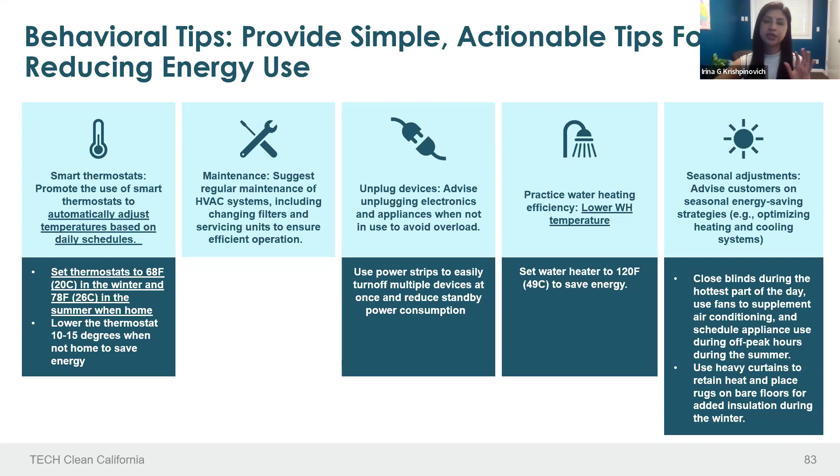This is the last slide for our presentation: rebates, incentives, and funding. At a very high level, you may already be familiar with most, if not all, of the many different types of income-qualified programs available to our communities and residents, which we can refer to or leverage to maximize our visit at a customer's home so they can take advantage of the many programs and services available to them.

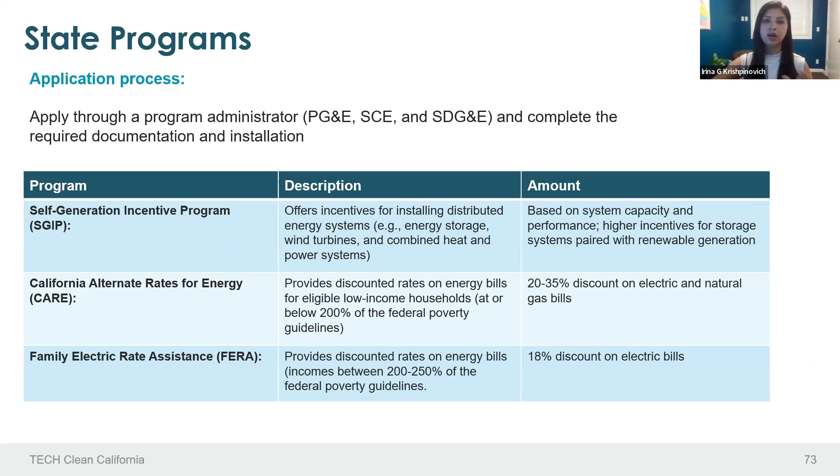We have statewide programs as well—utility cap and trade programs that offer not only appliance services but discounted rates applied directly to their bill that they can see. There are financing programs available that can assist with that upfront financial cost. PG&E savings programs—you're likely already familiar with most of these programs offered within your respective utility region.

Federal tax credits—there's an application process, credits which our customers can take advantage of and apply for.

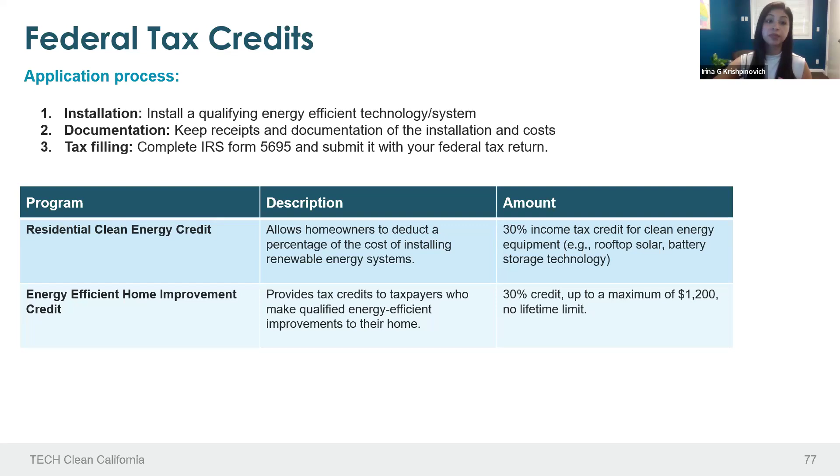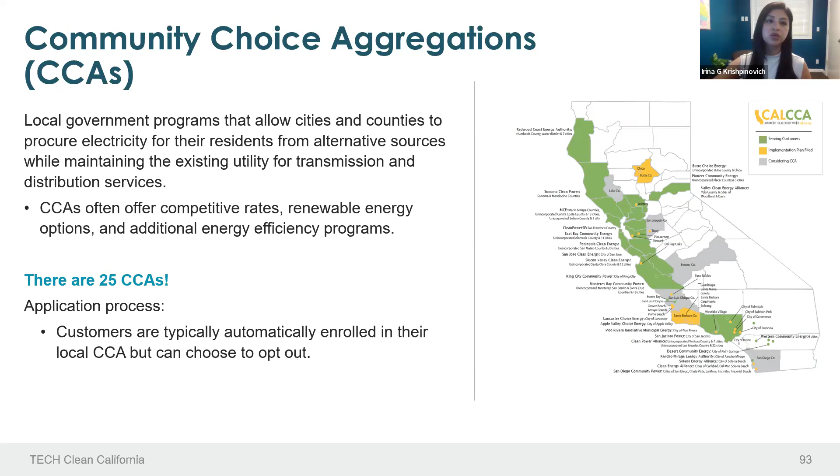Other incentive and rebate administrators within California to take into consideration include collaborative networks formed by local governments to provide energy programs and services, like community choice aggregations—local government programs that allow cities and counties to procure electricity for residents from alternative sources. Stay tuned for what's coming out of the pipeline of new programs, incentives, and measures.

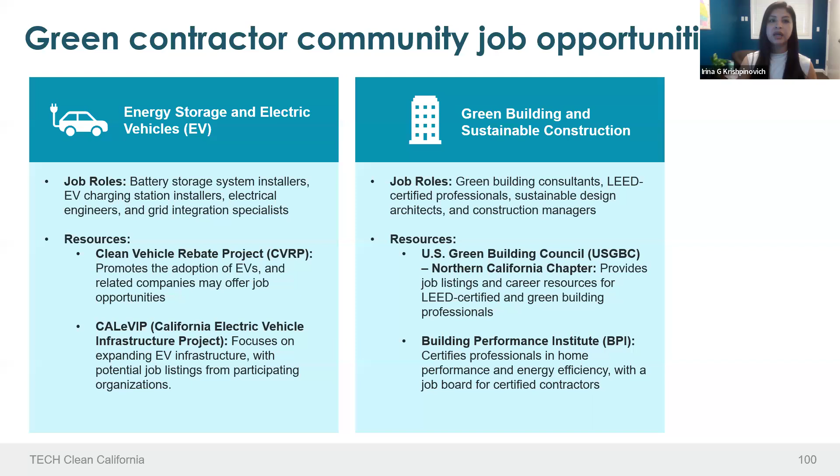In a nutshell, this concludes our presentation for today, so we certainly want to thank everyone. If you have any questions, in lieu of us coming offline due to time sensitivity, you're welcome to drop them into the chat or send any of the emails—you can email them directly to the tech email on the previous slide, or insert them into the chat, and we can take the question, answer it, and release a QA sheet for you.

This is Jeffrey, part of the Tech Clean California program. Thank you so much, Irina, for going through this. Just wanted to highlight a few quick things: the Switch Is On website has a list where you can go in and find all the incentive programs.

You can actually type in your zip code and it'll pop up. The reason I say this is there was that quick slide showing programs including HEEHRA, which just restarted last week, but sometimes these programs have different geographic territories, budgets, and requirements. So by going to Switch Is On, you can look up which incentive programs are available to you and your constituents.